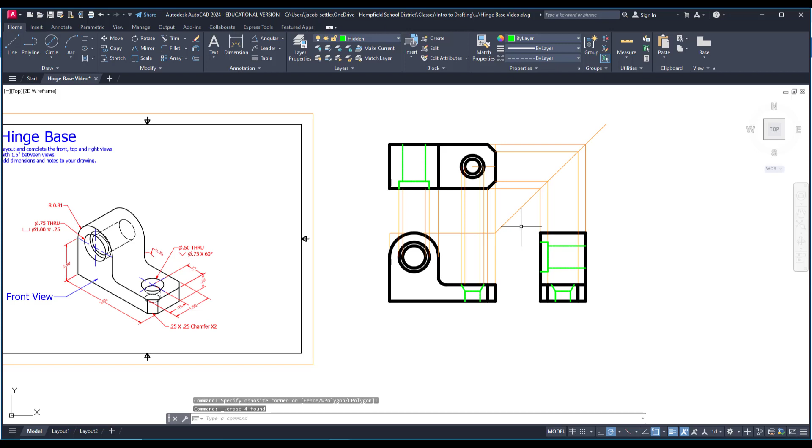So we have finished drawing the figures here. We're going to add dimensions now. So at this point, I'm going to get rid of all these extra hidden lines that I no longer need, or I'm sorry, not hidden lines, but our projection lines.

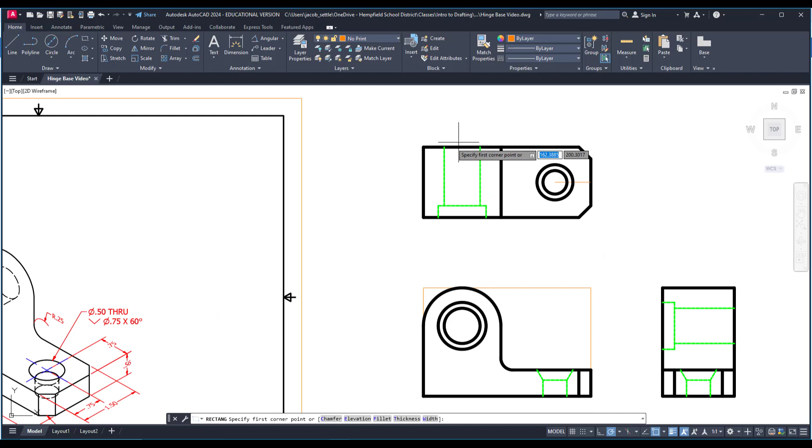I will need a box around each view that I'm going to offset. If you remember from the dimension unit, we are offsetting a box 3/8 and then an additional 1/4 inch around there. So I'm going to go to no print, and I need a new box up top here. So I'll go ahead and draw that in.

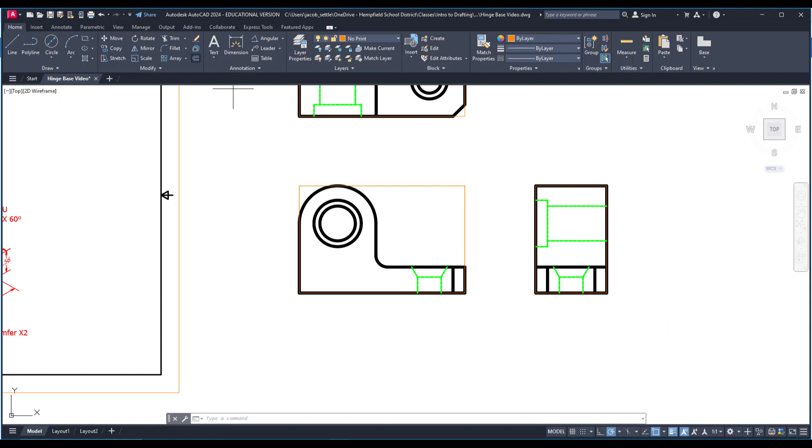I have these lines, but this is not a box, so I will go back and draw a box over top of that one, and I will also draw a box over top of this. Normally you would not want lines stacked on top of one another, but these are no print lines, so that's not an issue. I'm going to go to the offset tool. My first offset is 0.375.

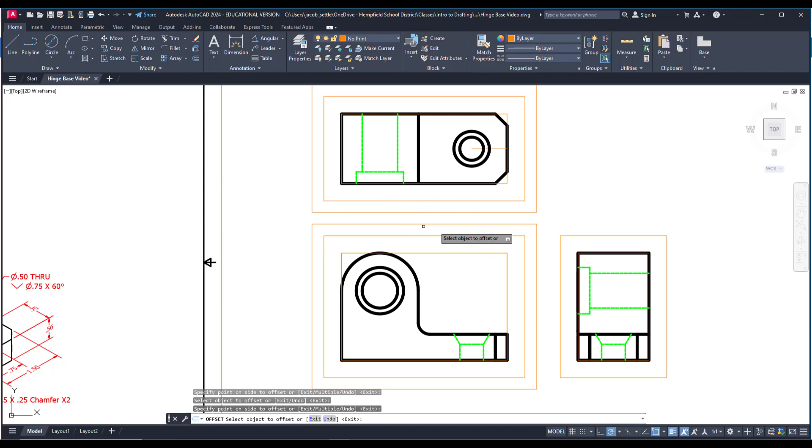That's how far away our first set of dimensions should be away from the object, just to give that object space. So we're going to do that on all three. And then if we need a second line of dimensioning, they'll be out an additional 1/4 inch, so 0.25. So we will offset these boxes out here. That's where we want to place our dimensions.

Now, we have a couple extra things we want to add in. We want to add in some center marks, and we also want to add in center lines. So I'm going to add in my center lines first. I'm going to go to the center layer, and when I draw this in, I'm going to try to get that midpoint, but it looks like I am going to have to project off of here.

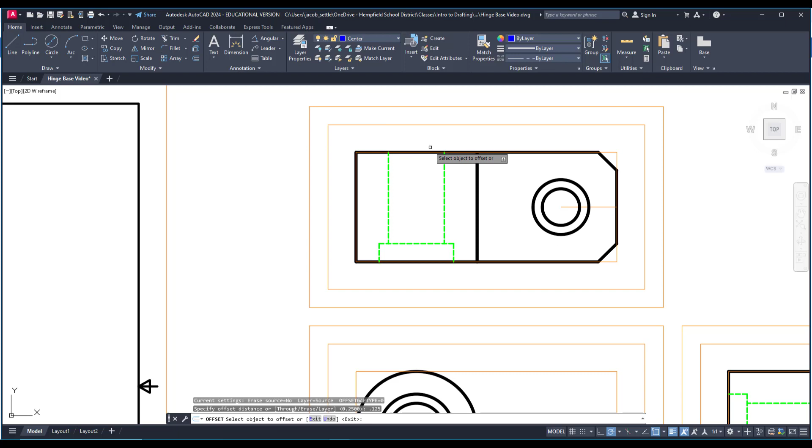I'm going to go ahead and offset a line out. We'll go 0.125. And that's how far out I'm going to have this center line stick out. And I will just draw from here to this point. And then I'm going to take this, I'm going to stretch it until it hits this line up here.

Now if you notice, similar to when we did hidden lines, this did not show up with the dash pattern. The layer property should be set up that the center line is set to a center line. It should give you this long short dash, and it's because the line is too short. There are two ways we could go around this.

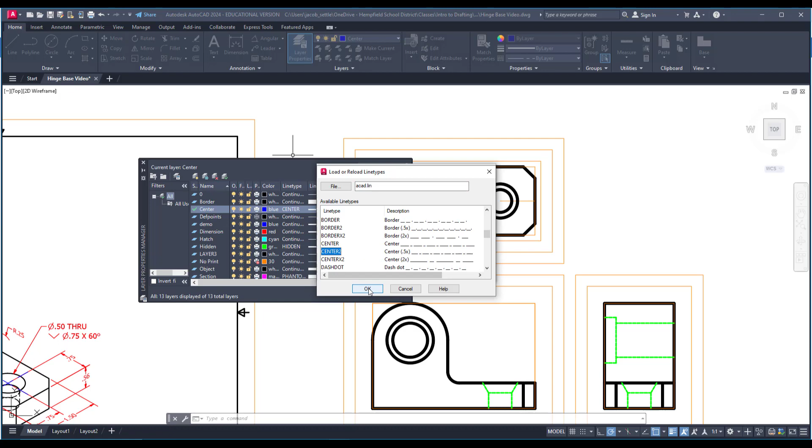We could look at the center line and we could see if there is a center 0.5x, and we could try this one. Let's try that first and see if center 0.5x will work for us. And that does seem to work. We'll see if it works down here. If not, we'll make a couple adjustments there.

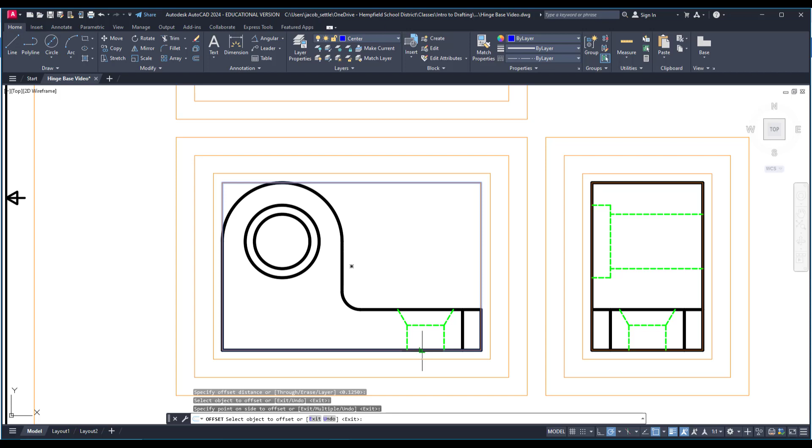So I'll go ahead and offset these boxes out once again, just for my center lines. This one here, I don't need to extend the center line all the way up to here. I just want to come out about 1/8 of an inch beyond the object, and as long as you are being consistent, it is fine. So if you were out 3/16, that would be fine as well.

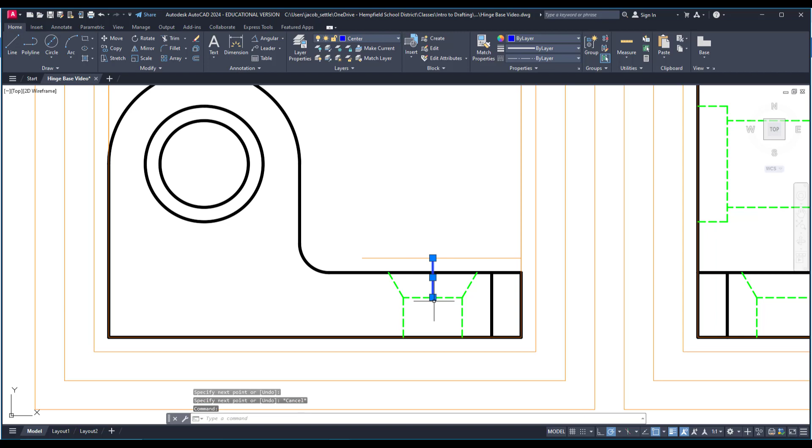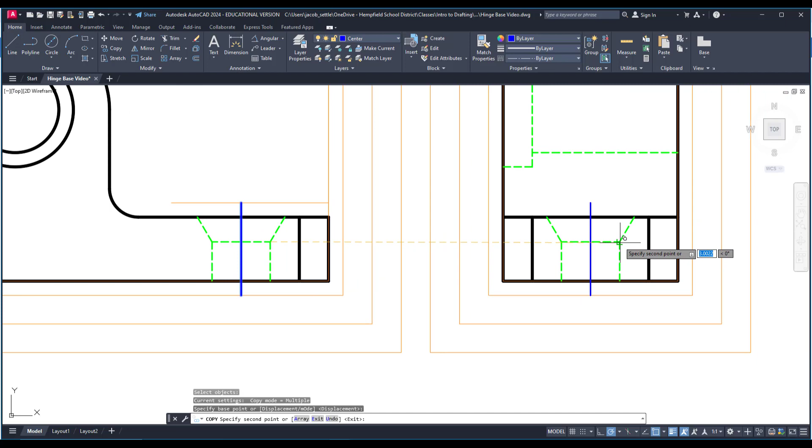But I'll go back to my center layer now, and I will redraw in a line from here to here, and then I will click and extend it from this end point down till it hits that one. I can copy that over, and I accidentally moved this hidden line here, so I'm going to move that back. So I'm going to copy this line from this point over to here, and I'm going to draw another line in for this view, and we'll take that one over to here.

Now for these circles, when you add a dimension in, so if I go up here and I add a diameter in, it should automatically generate a center mark. Center mark is one of the few things you'll have to leave the home tab for. If you go over to annotate, there is a center mark tool. It's going to give you a little bit larger one if you'd like to use that. Either one is perfectly fine.

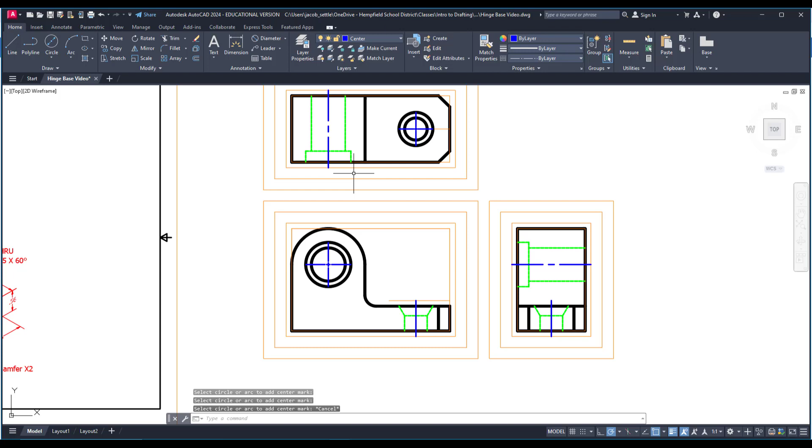Now that we have our center lines and center marks on there, we're ready to add some dimensions. You'll be using the exact same dimensions given to you to draw this. So before I go any further, I'm going to set my current layer to dimension. I'm going to go to linear, and I'm going to go ahead and pop in a couple dimensions here.

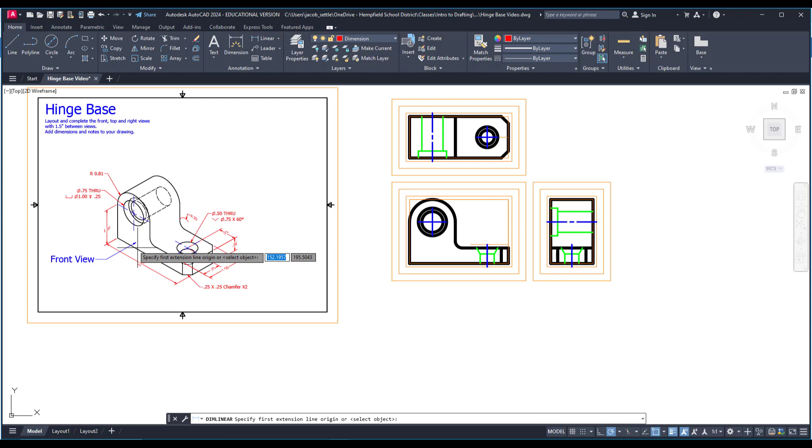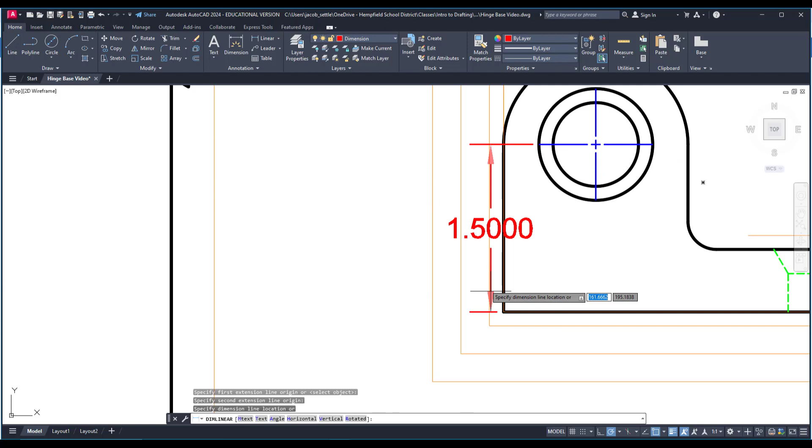Remember, we want to think about where the profile of the shape is. So this 1.5, this should go in the front view. So I'm going to click from here to here, and then I'm going to pull that out to this point. And you notice I grabbed the wrong point here. I can simply bring this up, and I could place that point back on here, but I'm missing the tail, so I'm going to go ahead and get rid of that, and we'll pop that back in. That's going from here to here, and we're going to drop that on this layer right here.

Now I've got a lot of extra zeros set up, and I've got to edit some text sizes to fit. So now that I have one up there, I'm going to open up the annotation toolbar, and the second button on the left is dimension style.

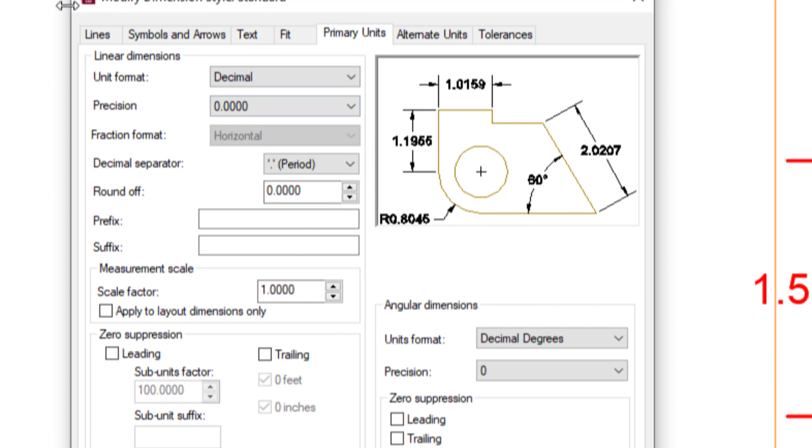So you're going to select dimension style, and you're going to go to modify, and we're going to go through changing a couple things. We may have done this already as a group, so you can skip ahead if you've already done this. But I'll go to lines, extension beyond dim lines. This should be 1/8 of an inch. Offset from origin, that's this little space here, 1/16 of an inch.

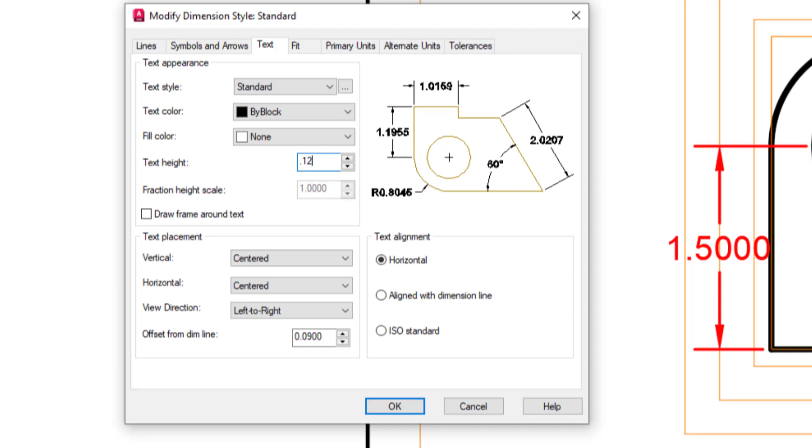Symbols and arrows, we're going to drop these down to 1/8 of an inch as well, just so things fit in there nicely. Text, we'll set text to 1/8 of an inch as well. Fit, either text or arrows is fine. Primary units, we're going to suppress leading and trailing zeros so we don't end up with all those extra zeros after the 5. And decimal degree will go out 2 decimal places on that one.

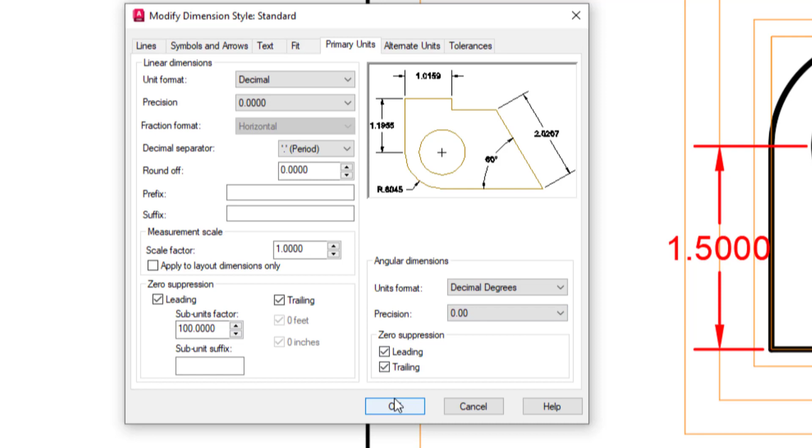We don't need anything in alternative. You can also suppress leading and trailing zeros on your angular dimensions. So we will hit OK on that and set current. And you'll see that makes things a little easier to read.

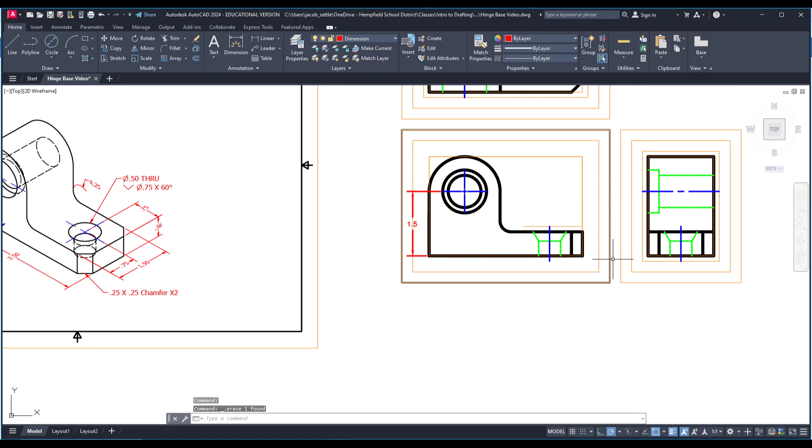What I usually recommend you do is, as you place the dimensions on here, just put like a circle or a check mark around them to show that you have completed that. That way you know you're finished when you're all done. I'm going to dump these 1/8 inch boxes out of here so I don't continue to click on some of those.

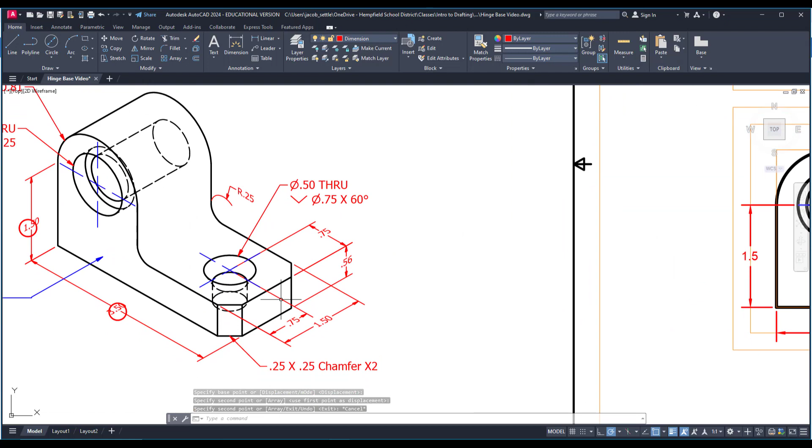So I'll continue going around. I'm going to put my length dimension down here, and I'll snap that right there. And then I can copy this little circle as I go and make sure I'm putting all those in there. In the top view, I want to locate where this circle is, so 0.75 over and 0.75 up. So this is where we're going to run into where we need both levels of dimensioning.

So if I click from here to here, drop that in, and then I also put a dimension from here to here, and I pull this out. Now, AutoCAD put this out here. If you want, you can select it and you can drop it on the inside. Sometimes it doesn't fit and you just have to leave it on the outside. That's perfectly fine.

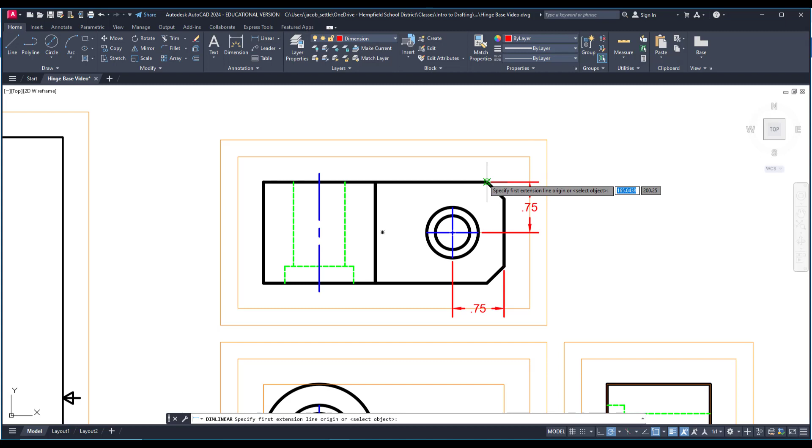The next one I'm going to add in is one that gives me the entire width across. I'm going to drop this one out here. Typically we want to keep our number in the center. If it is going to be intersected there, you can drop it down a little bit to make it a little bit easier to read. Again, we're all about trying to make things easy to read, easy to communicate here.

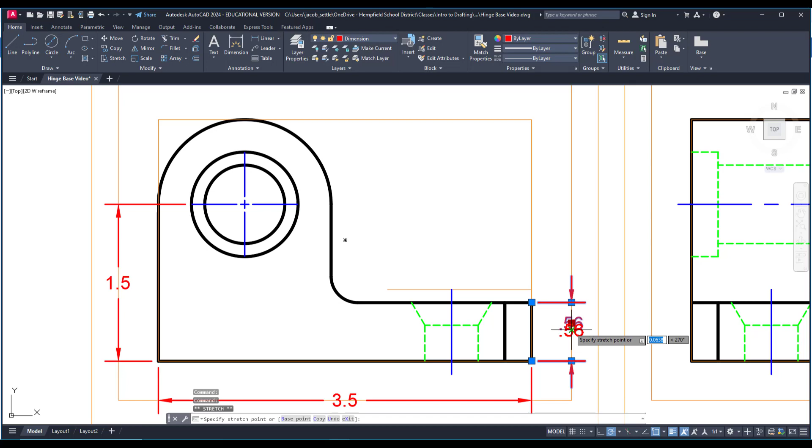The next piece I might do is probably this 0.56, and that would make sense here. This is the profile. I see a line here. I see the shape of that right here. So I'm going to go ahead and put another linear dimension in, and I'll drop that here. You can see if that one will fit on the inside. Sometimes you can pop that in there and it'll push the arrows to the outside. You'll have to play around with what's going to be your best fit on some of those.

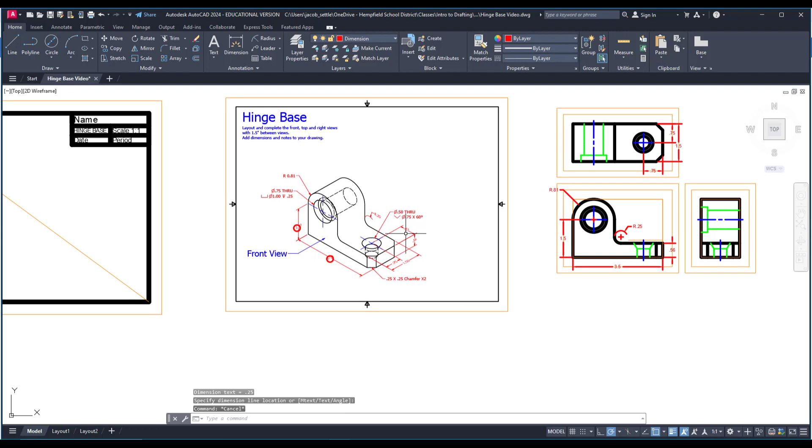I have this outer one, so from this drop down up here, I'll select radius. You can pop that one out there on that first layer. And then we have a fillet down here. On this one, you don't need to bring this all the way up to here. You can kind of leave this right down there. That's perfectly fine. So if we go around, I'm going to say, all right, well, I did this one, this one, this one, this one, this one, and I did this one.

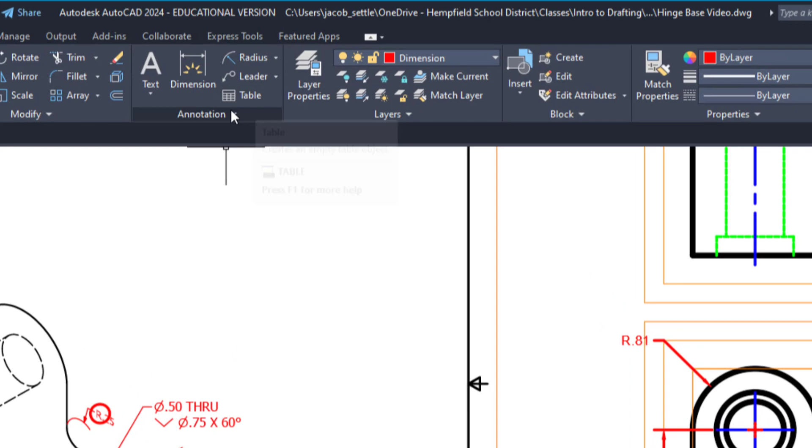So the things I have left, I have this chamfer note, and then I have these 2 holes. We'll start with the chamfer note because that one's pretty simple. You will start with the leader tool. Now, I have not updated the size to my leaders, so these are different than dimension, but if you go into this third button on the left, you can modify your leader size so it matches everything else.

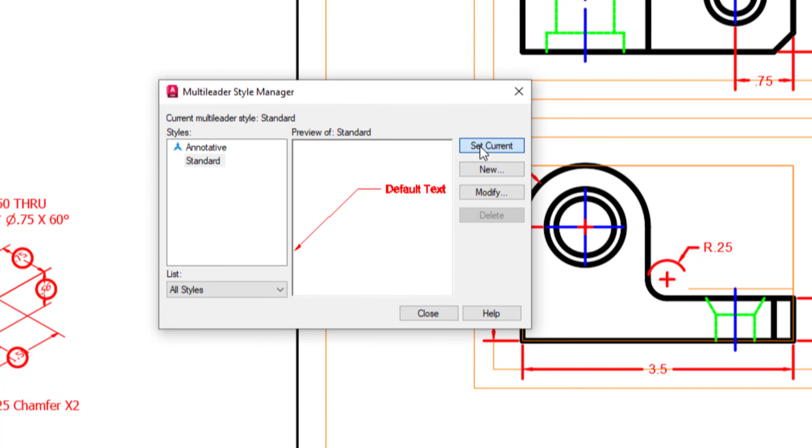So you can make these arrowheads 0.125. And let's see, under content, you can change this height to 0.125 so it matches your dimensions. And then you just want to hit set current and close that.

So I will add a leader. I'm going to grab a point along here. I'm going to pull that leader down, and then I can type what I want that to say. And you're typing the exact same thing that goes down here. So 0.25 by 0.25 chamfer.

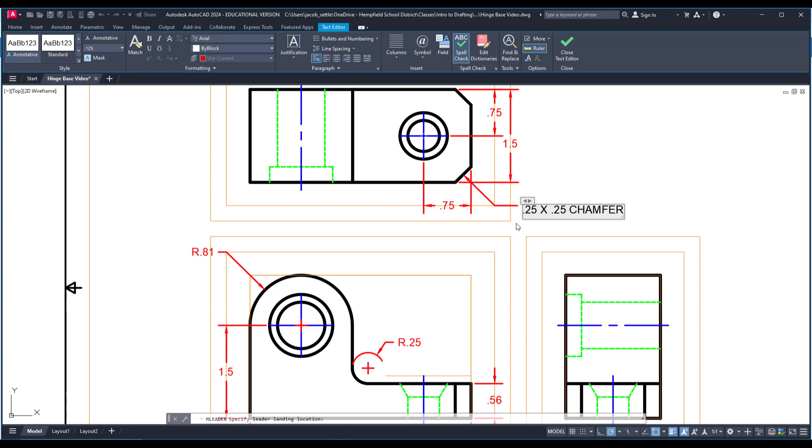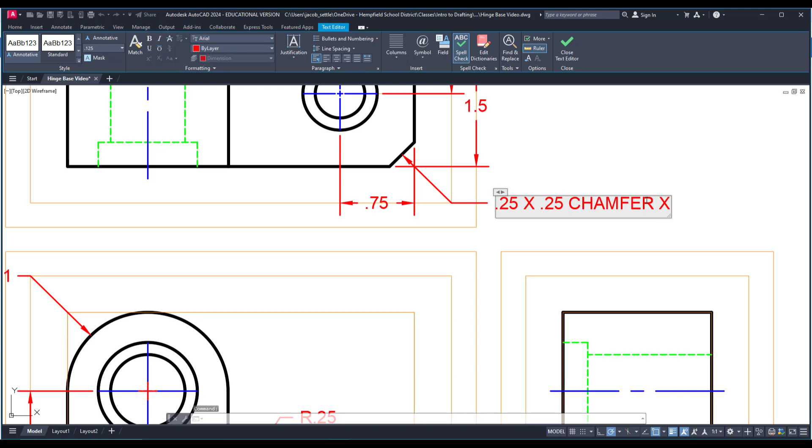And we do want to use all caps whenever we're calling any of this stuff out. Now again, the best method would be to add in all symbols instead of the through here. We can disregard the through. We'll just use the other symbols that are on here. I did forget to put the ×2 on that, so I'll just double click and then do X2 on the chamfer. So I'm calling out both of those.

The next one I'm going to do is the counterbore here. So I will first start with a diameter, and I want diameter 0.75 first. So I'm going to go ahead and click on this inner circle, and then I'll drop that up on this box. And at this point, I have to make some edits to this text. So what I'm going to do is explode it. So I'm going to use the explode tool, and now it's just lines and this piece of text.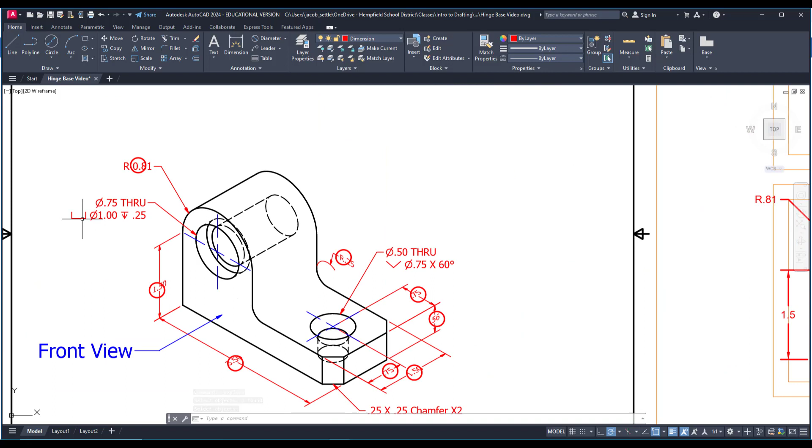I need to make this piece of text say the counterbore diameter of 1 and depth. You'll need to download this dimension symbols AutoCAD drawing to grab these 3 symbols from. That's on Schoology in the Hinge base assignment. All you have to do then is copy those to the clipboard and then go back to your Hinge base and just kind of paste those in somewhere.

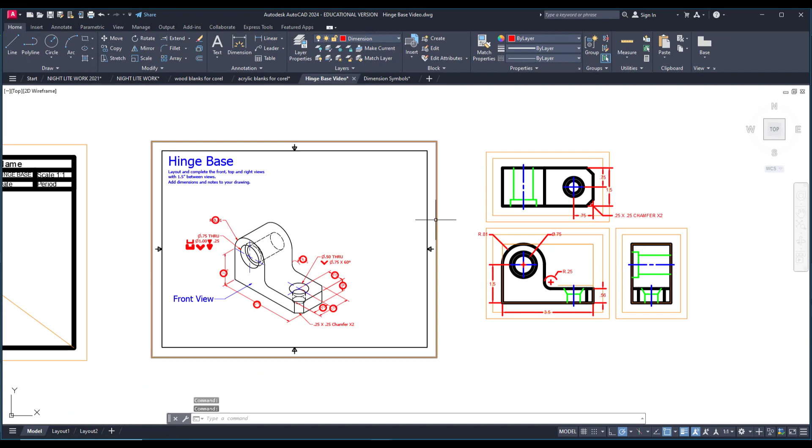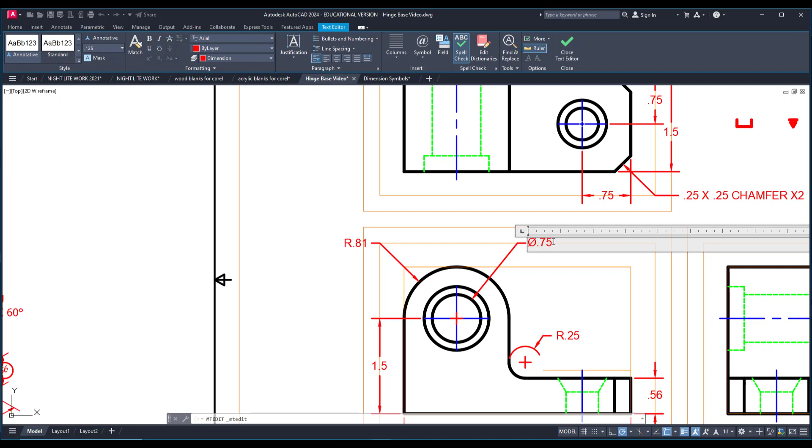So we have those. We're ready to modify this. We've already exploded it. We're going to make it look like this one here. So it'll say counterbore and then the diameter 1 inch and the depth of 0.25. So I'm going to double click and I'm going to go down here, and from the symbols drop down I will add diameter and then I'll put 1.00, and then I'm going to add a couple spaces in so that I can put that depth character in, and then I'll put in the 0.25.

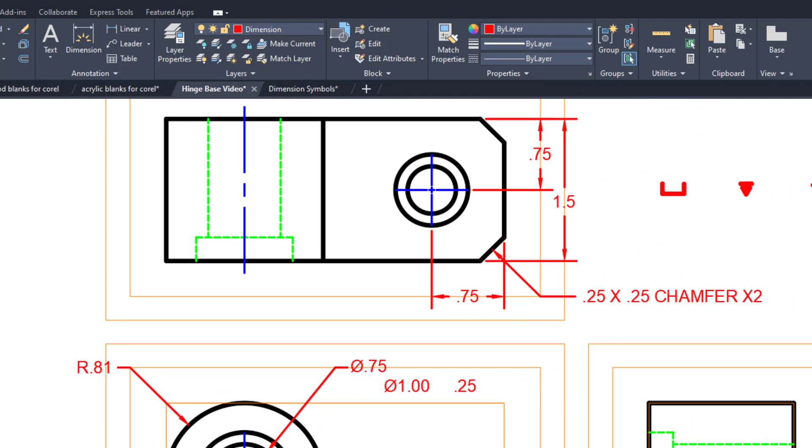I'm also going to add a couple spaces here so I can put in the counterbore symbol. We may have to adjust that. We'll see what that looks like. And then I will just move this down into place. So put that right in front there. So it says counterbore diameter 1. And then I will grab the depth symbol and I'm going to move that in front of the 0.25. Then you have that one done.

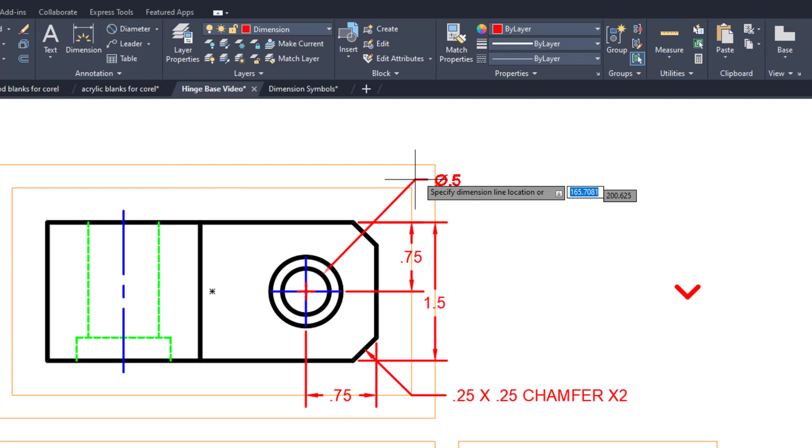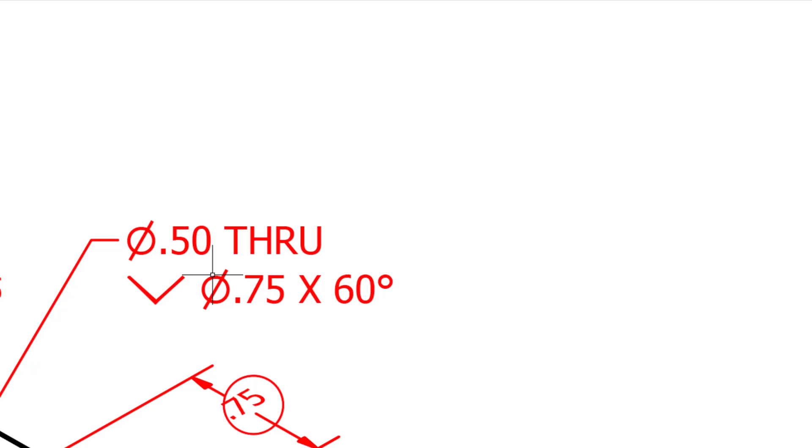Last thing to do is to get the countersink up here. So again, I will start with a diameter dimension. I'm going to pull that off the smaller circle and I'll drop that right up about here. Again, anywhere between 30 and 60 for your leader is perfectly fine. We need to explode that next, so we're breaking that into text and just lines. We're going to look at the note down here, so we can disregard the through part, but it should say diameter 0.5 and then countersink diameter 0.75 by 60 degrees. So we're going to add that in.

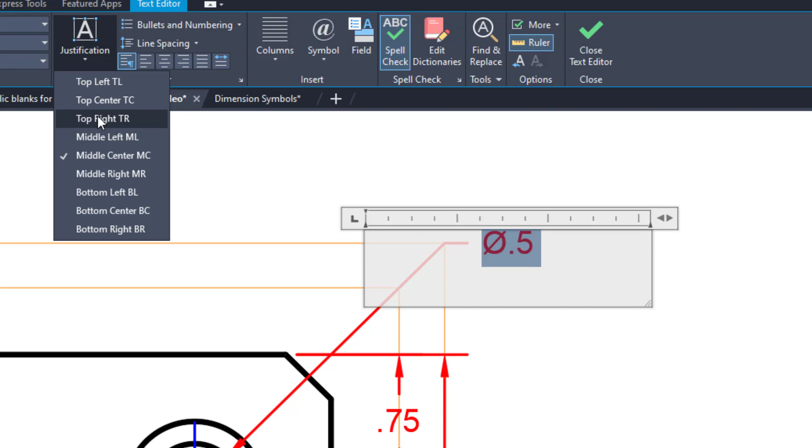So I'll double click my text box here and then I'm going to hit return to go down to the next line. First thing will be the countersink symbol, so I'll give myself a couple spaces there. What you might need to do, this is center aligned text right now. I'm going to go to justification and pick top left, and then I can move it later. So I'll drop down here, give myself a couple spaces for that countersink symbol, and then go up to the symbols drop down and add diameter. The diameter was 0.75, and then times 60 degrees. Degrees is up here in symbols.

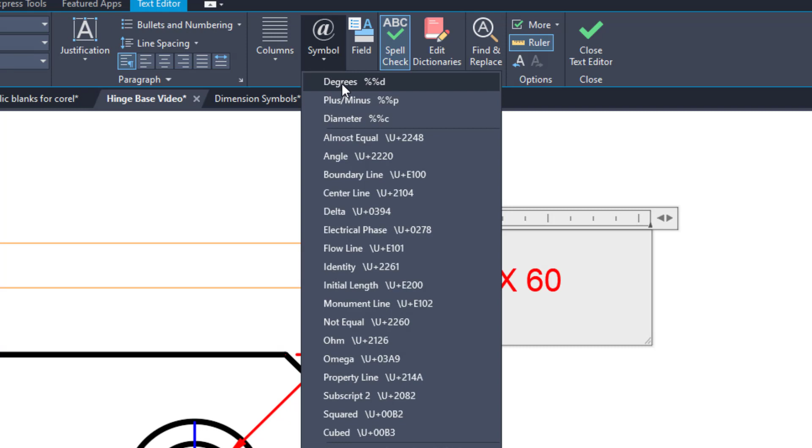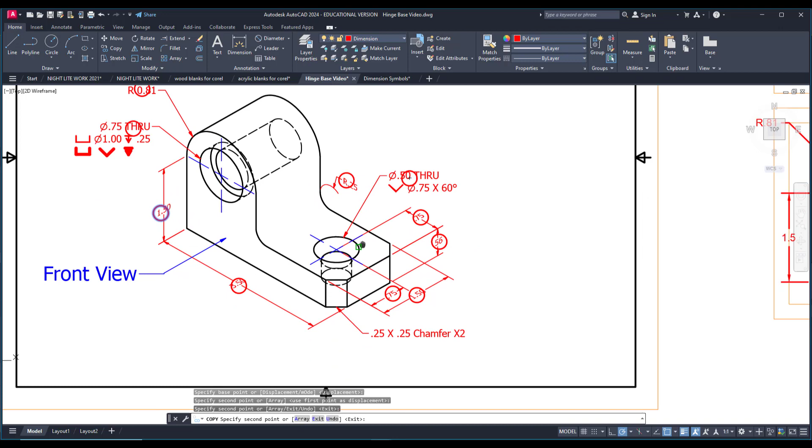I can close that. I will then move that over so it looks like it starts at the end of that leader, and then I can simply bring in my countersink symbol and drop that in place. Those are the last 2 then. So if I were to take my little circle, continue kind of checking off with that circle that I've done them all, I've got everything dimensioned. Last thing to do would be to put it in a border. So I would draw a no print line diagonally across the workspace here.

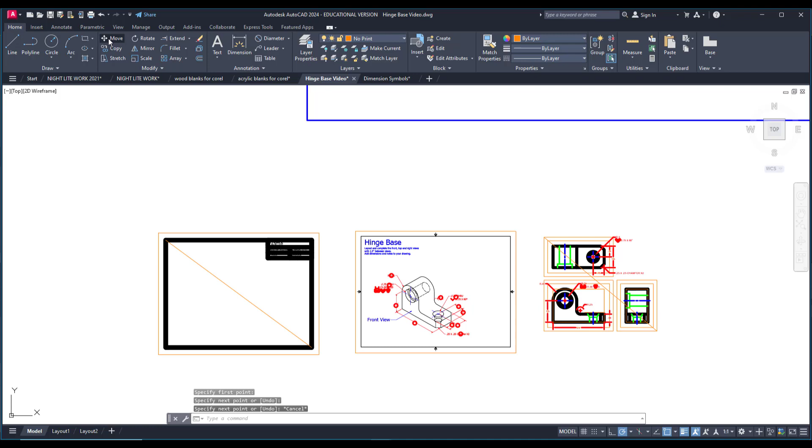Now we need to make sure dimensions fit in, so I'll click across the whole thing and we'll see how that works out. So we'll move this over from its midpoint to the midpoint of that line, so right there. That looks a little tight right there, so I'll have to move a couple things around in order to get that to work. If you need to drop it down here, if you need to bring it over to this angle, that would be perfectly fine.

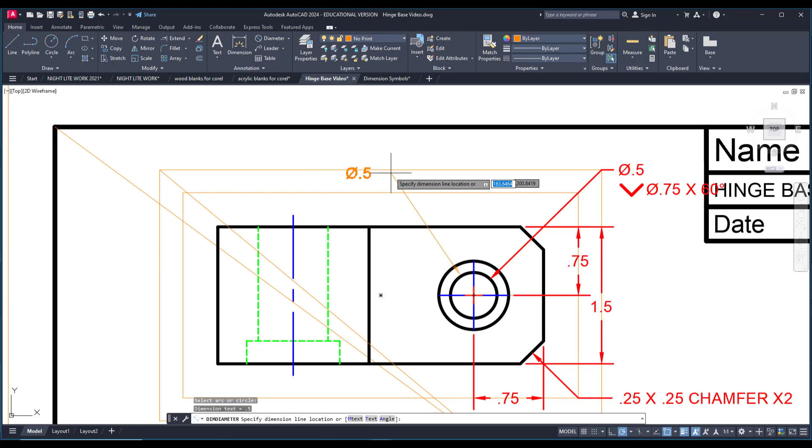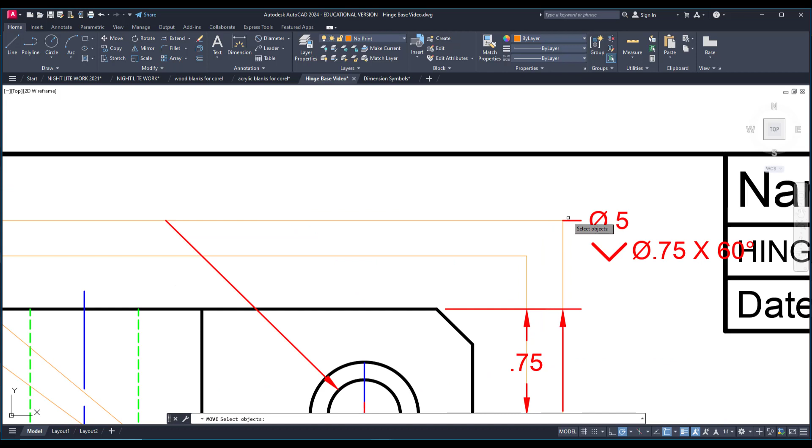So the tricky part about this is I have exploded this, so if it was just a diameter, I could take it and just pull it over. It is just lines and arcs right now. So if I was going to rotate this thing, I'd have to rotate this over from the center point of the circle. Makes it a little messier. So if I rotate this over and let's say I want to drop it kind of right there, then I would have to move this line over there to there.

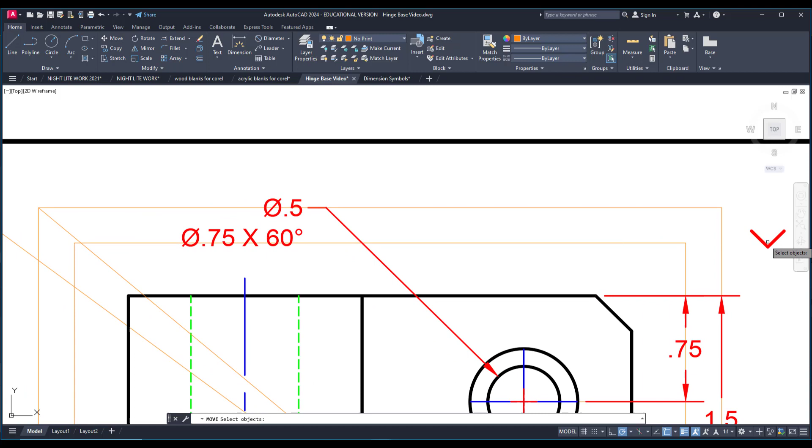So I'm going to double click my text, highlight the text, and then I will do top right justification for this one. And then I can push this over. So I'll take this over here and move my countersink symbol over with it. And then you are ready to print.